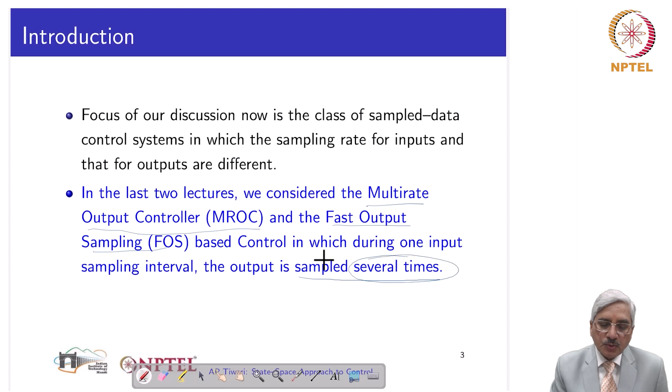In the previous two lectures, we considered the multi-rate output controller, abbreviated MROC, and the fast output sampling based controller, or the FOS controller. In both of these, the rate of sampling the output was faster compared to the sampling rate for the input. So during one sampling interval corresponding to the input, the outputs were sampled several times during that. These two controllers we discussed, the MROC and the FOS.

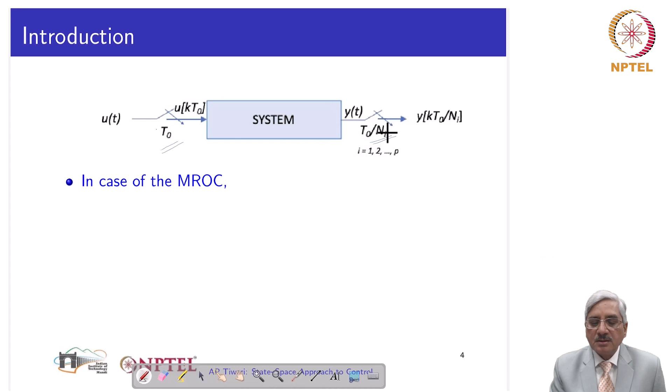In case of MROC, the input sampling rate is T0, the output sampling rate is T0 by N1, T0 by N2, etc. The control system is a dynamic control signal computed using the previous value of control signal and the multi-rate samples of output. This is just a recall. So MROC was characterized by this, that it is a dynamic controller.

The value of input at k plus 1 T is dependent on the previous value of input and again multiplied by the samples of output. And sampling rates of different outputs were different. So output 1 was sampled at T0 by N1, output 2 at T0 by N2, and so on. So in the multi-rate output controller, the output sampling rates for different outputs were different, allowed to be different.

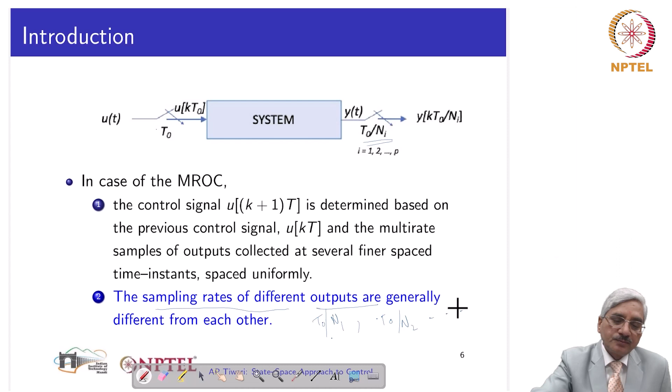Then we discussed the fast output sampling based controller. This is very similar and can be regarded as a special case of multi-rate output controller. In this one, the input signal is computed based upon the control signal. In this case it is non-dynamic, it is static. So previous control signal, that knowledge is not required. It is calculated based on the samples of output collected a number of times during one sampling interval.

So several finer time instants, at those instants the outputs are collected and from that the input is generated. The only difference from MROC is that the output samples are taken at the same rate for all the outputs. In MROC they were N1, N2, N3, etc., the number of samples in one sampling interval of input. Here it is N for all the outputs. All outputs are sampled at the same rate, N by T0.

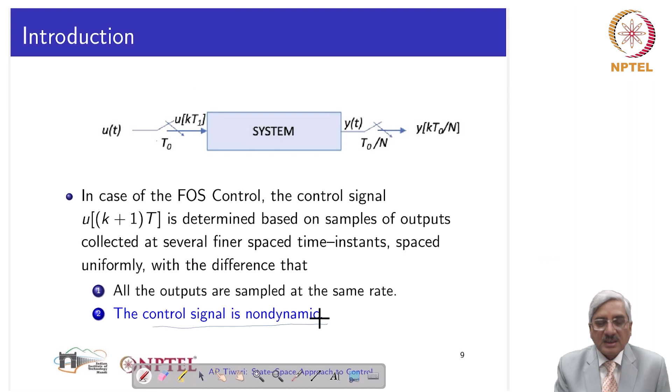If T0 is the input sampling rate. Again there is a misprint here, it should be u(kT0). I'm sorry for this misprint. So that is in what sense FOS and MROC are different. And of course, as I told, the control signal is non-dynamic in case of the fast output sampling based control.

Remember, in fast output sampling, the input samples were collected at larger intervals of time T, and the outputs were sampled at the rate delta. However, in periodic output feedback, the input is updated several times during one interval T. So the distinguishing feature of periodic output feedback controller is that the output is sampled at a slower rate 1 by T per second, and the input is sampled at a faster rate 1 by delta per second, and delta is T by N. N is an integer which is greater than 1, of course. So the inputs are sampled at several uniformly spaced instants of time during one output sampling interval.

This is one feature. The other thing is that control gains, I will explain this, they are periodically varying. That means control gain at some time is equal to the control gain sometimes in the past, and it will repeat again and again. I will show with the help of the mathematical expression.

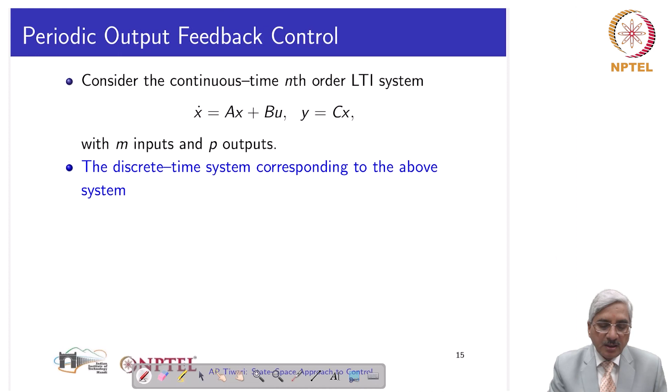And we have its corresponding discrete time system for two sampling rates. One sampling rate 1 by T and other sampling rate 1 by delta. And recall that phi(T) is e power AT, and gamma(T) is integral between 0 to T of e power A tau B d tau. Similarly, phi(delta) and gamma(delta) can be given; in place of T, we will have delta. That is the difference. So we have the same continuous time linear time invariant system, and we have the corresponding discrete time systems for the two sampling rates, one 1 by T and the other 1 by delta.

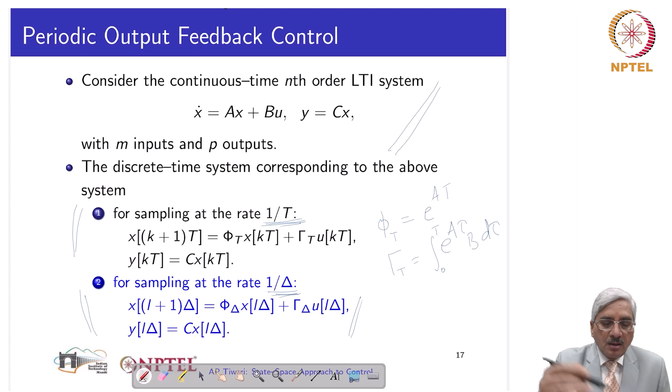So in one sampling interval of output, we divide and obtain n subintervals, and at the end of each subinterval we change the input, as given by this. The input between kT plus L delta and kT plus L plus 1 delta: during this interval, the input is again KL times Y(kT). Y(kT) is the output collected at this instant, multiplied by KL, giving the input for this period.

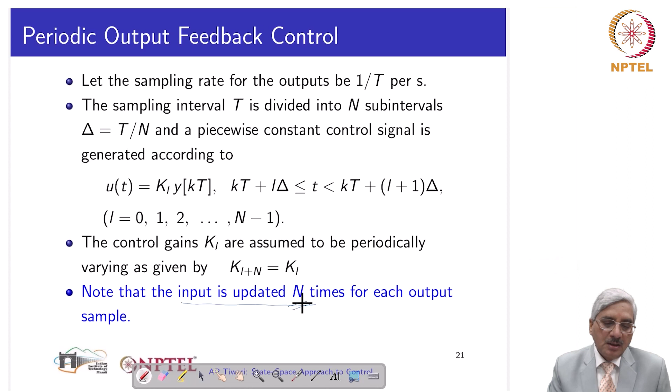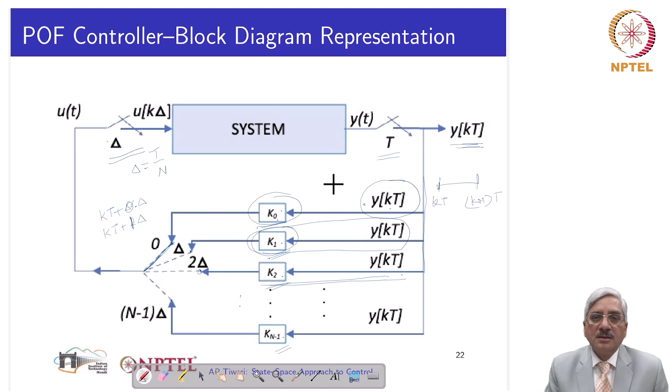Periodic output feedback and fast output sampling feedback controller can be considered as dual of each other.

Now we derive the expression for periodic output feedback control gains K0, K1, etc. We are going to derive the mathematical expression for that, and for this we start with the state of the system at different subintervals. So we consider the value of state at kt plus delta.

It is phi delta, the value of state at kt, and gamma delta into the input at instant kt. The state of the system at kt plus delta is given by this.

At kt plus 2 delta, the state will be phi delta into the state at the previous instant, considering time instants separated by delta subintervals. So phi delta into x at the previous instant plus gamma delta u at the previous instant, and this one we have here.

So we can substitute this expression in this one, and then we will have this expression: phi delta into this, which is the expression for x kt plus delta, and this is here. This we can further manipulate to obtain phi delta square. This and this will give phi delta square x kt, and then phi delta gamma delta into u kt, and then this as it is.

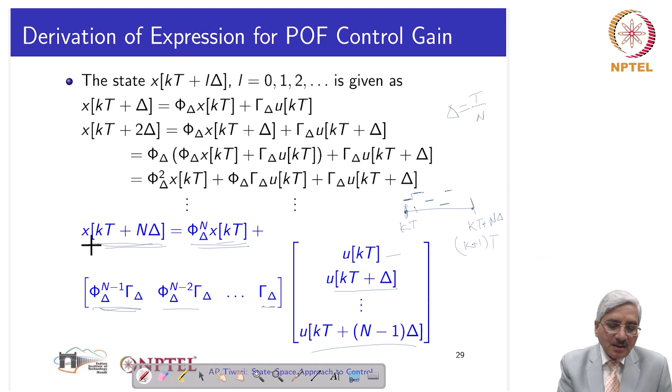So the values of the input, this one, this one, this one, etc., are generated from the sample of output at kt, multiplying by k0, k1, k2, etc. So that gives this one.

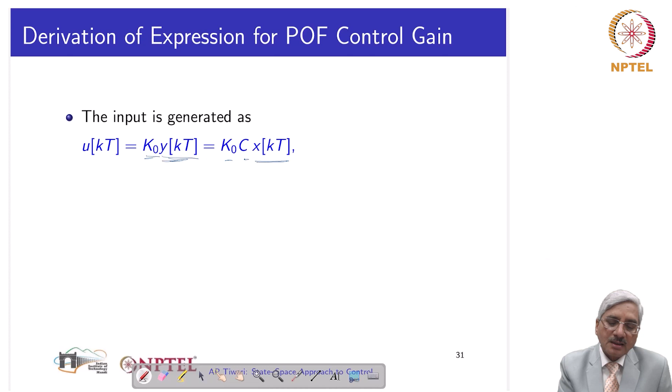Once we obtain that, the input is k0 times ykt, so it is k0 times cxkt, since Y is cx. At the next sub-instant of time, kt plus delta, u will be k1 times ykt, so k1 times cxkt. We are considering the output at kt instant only, so ykt is same as cxkt, and so we have ukt as k0 cxkt, ukt plus delta as k1 cxkt, and so on.

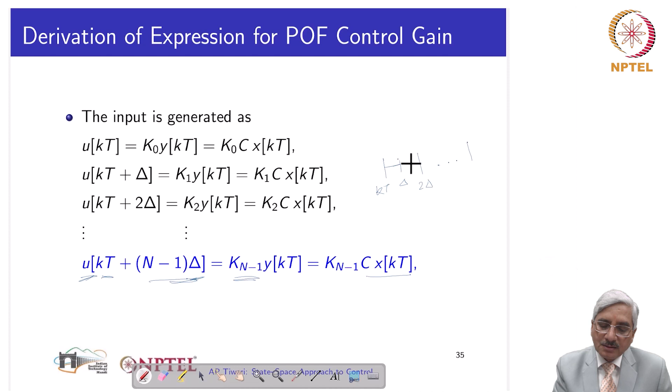The next input will be k2 times cxkt. In this manner we can go on, and we have the input in the last subinterval. This is kt to kt plus delta, this is kt to kt plus 2 delta, and so on, the last one being kt plus n minus 1 delta. This will be kn minus 1 into y, which is cx. So in this manner we have the values of input during these subintervals of time.

So based on these, we can have x kt plus delta from x kt, and this is the value of the input, which is y, multiplied by gamma delta. So we have x kt plus delta. Similarly, x kt plus 2 delta, and so on. In this manner, we will have x kt plus n delta given by this.

Now we start taking a look. This one is containing phi delta x kt. This one is containing 2 delta, so phi delta square. This is n delta here, so phi delta power n. And this is only delta, so it is gamma delta into k0. Here 2 deltas are there, so gamma delta k1 and gamma delta k0. Here n are there, so we have gamma delta k0, gamma delta k1, and so on, gamma delta kn minus 1, and each one is remultiplied by phi delta square, etc.

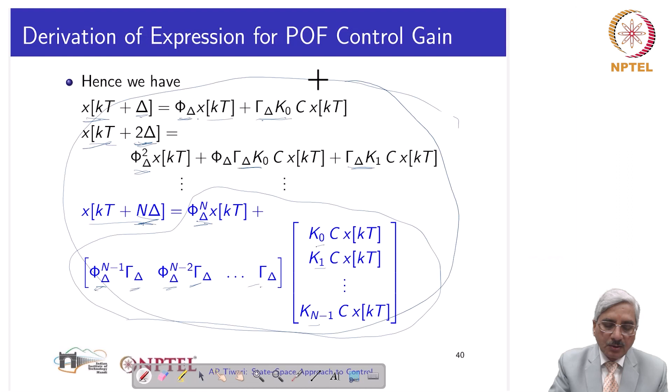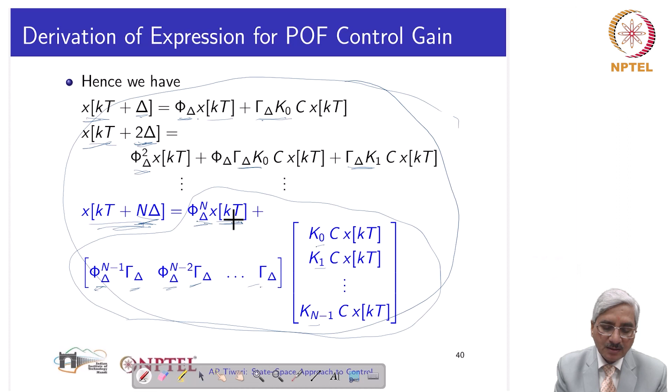From these expressions, those come. X k plus 1 t is x at the preceding sampling interval, at the rate 1 by t, multiplied by phi delta n, and then this product. This is this. This is this.

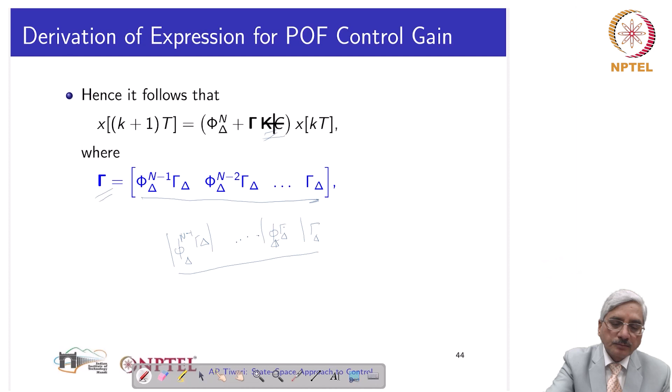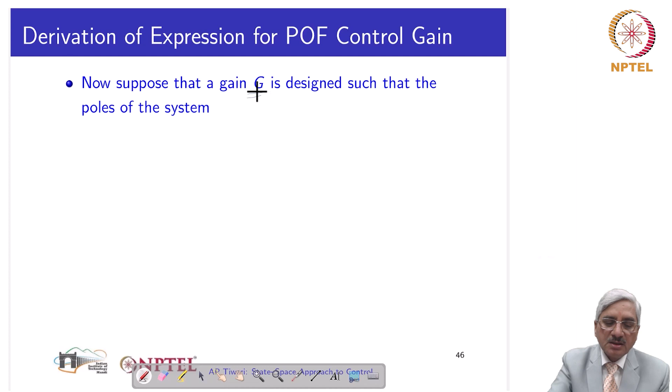Now at this point we hold the equations there and we think of a gain g in phi t plus gc, such that this phi t plus gc system will have desired pole locations in the unit circle, because we are talking of a discrete time system, so we are talking of the unit circle in the z plane. So we assume existence of a g for the system phi t c.

It is not phi t gamma t, please mind it. Phi t gamma t is coming from the state equation. Here it is c coming from the output equation. So we take phi t and we take c, and we assume that there exists a g such that this system will have desired pole locations.

Of course, this is the same as phi t transpose plus c transpose g transpose. So if we consider the dual of the system phi t gamma t c, and for the dual system, meaning phi t transpose and c transpose are considered respectively as system matrix and input matrix, we are designing a controller g transpose, which will be the gain.

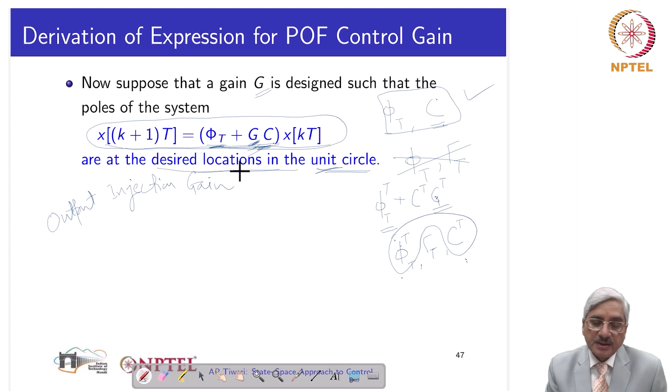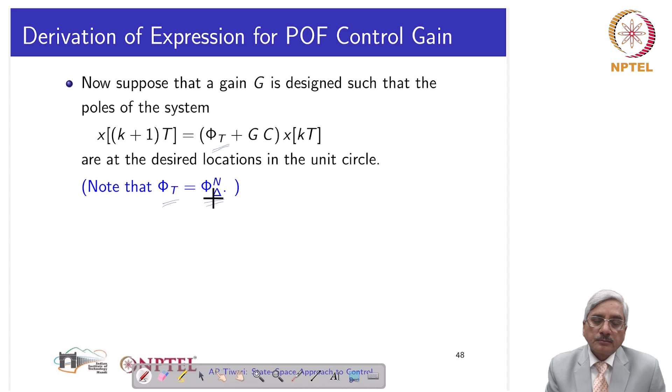That is done, and of course we have this relation: phi t is the same as phi delta power n. So we compare this system which we obtained in one of the previous slides and this closed loop system with phi t substituted by phi delta power n, and we see that the two systems will behave similarly, meaning the state at next time instant will be the same if this matrix and this matrix are equal, meaning that gamma c, gamma kc, and gc should be equal, and that means gamma k should be equal to g.

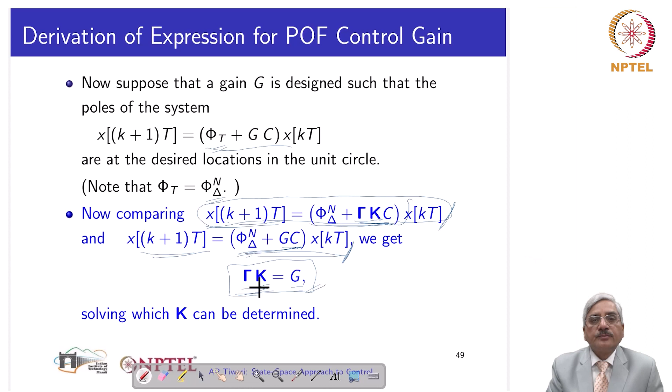This is the expression for the periodic output feedback gain, and this should be solved to get k. And of course gamma is this. So we can immediately see that this matrix will have full rank if n is greater than or equal to mu, and mu is the controllability index of the system, meaning...

phi delta mu minus 1 gamma delta, phi delta mu minus 2 gamma delta, and so on, gamma delta; this rank equal to rank of phi delta power mu gamma delta, phi delta mu minus 1 gamma delta, and so on phi delta gamma delta, gamma delta.

So this mu, sorry, all these are mu. So this mu is the smallest integer for which the rank of this matrix and the rank of this matrix are equal. That is the controllability index, how it is to be taken here.

And if we choose n satisfying this, greater than or equal to mu, then gamma will be full rank. And if gamma is full rank, meaning gamma inverse will exist, meaning we can solve this equation. It is so, that is one thing.

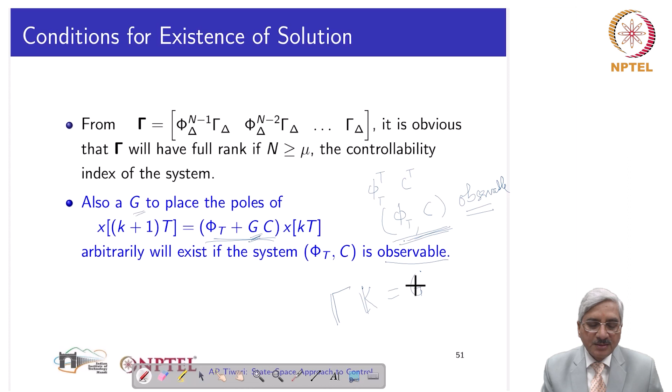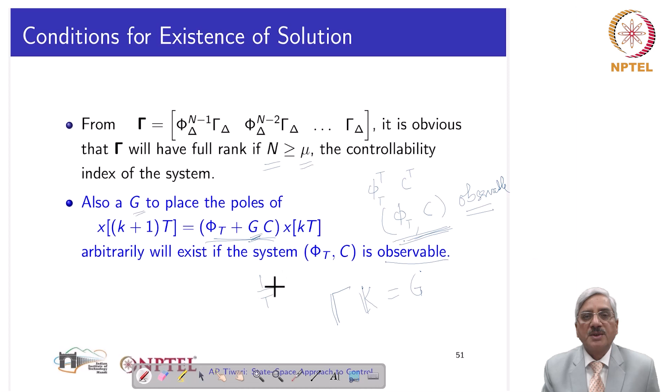So the solution to gamma k, this bold gamma k equal to G, will exist if n is chosen to be larger than or equal to the controllability index of the system, and if the system sampled at the rate 1 by t is observable. In that case, gamma will exist. This is summarized here: the sampled system should be controllable and observable, and the number of subintervals in t should be larger than mu, the controllability index. Then the solution will exist.

Now there are two possibilities. If n is exactly equal to mu, then the solution will be unique, because gamma is inverted, the number of unknowns equals the number of equations, and gamma has full rank, so its inverse will be obtained. So the solution of K will be unique.

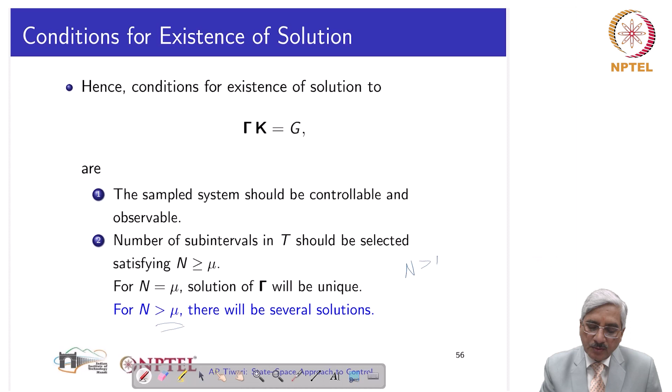However, if n is larger than mu, then some of the gains K are to be assumed, since the number of equations is fewer than the number of unknowns, meaning we can have extra considerations in the periodic output feedback gain design. So some K are to be selected differently and the remaining are to be solved from the equations. In this manner we can solve this for both n greater than mu and n equal to mu. Solution will not exist for n less than mu.

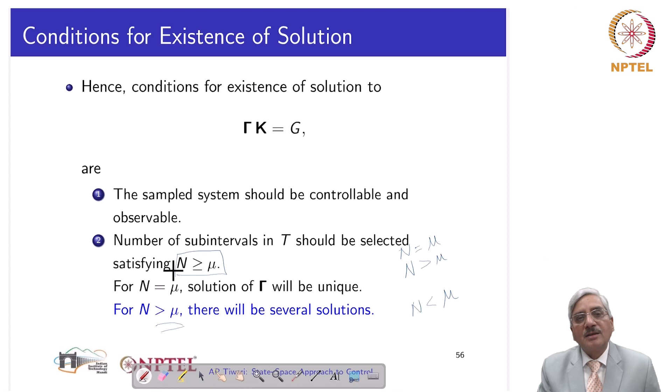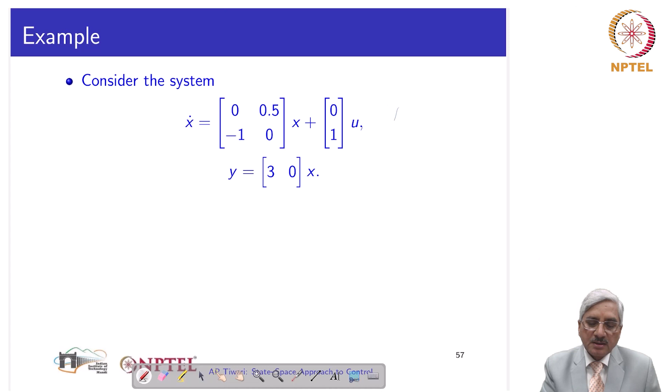We are constrained to select n greater than or equal to mu. Now let's see, with the help of the same example, the fast output sampling based controller. We consider that system, which when discretized for a sampling period equal to 1 second, gives this state transition matrix, or system matrix, and this input matrix, phi t and gamma t.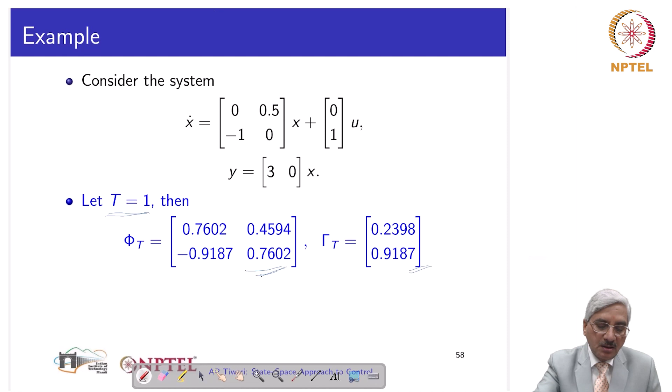Using this phi t and this C, we can design a G, and we see that this G places the poles of phi t plus gc at these two locations in the z plane. Both of them are less than 1, so the system is stable. It may or may not satisfy some transient performance characteristics, but just for demonstration of the design of a periodic output feedback controller, we consider G to obtain these pole locations for phi t plus gc.

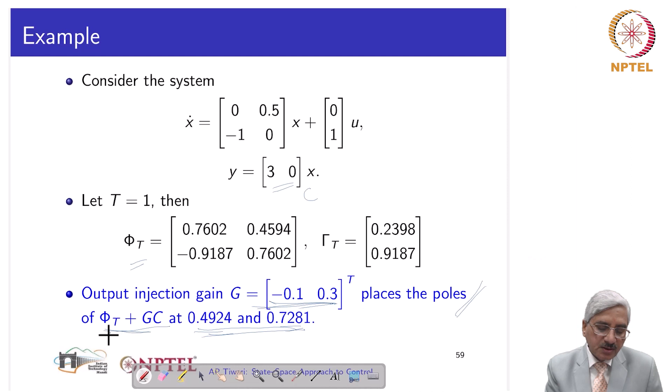Once G is there, the next job is to obtain K. That will require phi delta and gamma delta. So we select n equal to 2 subintervals in each output sampling interval, and delta becomes t by n, t by 2, so 1 by 2, which gives 0.5. For that, this is the system matrix of the discrete time system, and this is the input matrix for the discrete time system corresponding to the continuous time system in the example, for the sampling rate of 2 per second, 2 samples per second.

So then this bold face gamma is phi delta, gamma delta, and gamma delta, 2 columns, these. And then K is obtained as gamma inverse times G. G was there on the previous page. So gamma inverse G gives this, and this K is the required periodic output feedback gains. It will have the same pole locations as those which G gives for phi t plus gc. This K will give the same pole locations for phi t plus gamma k c.

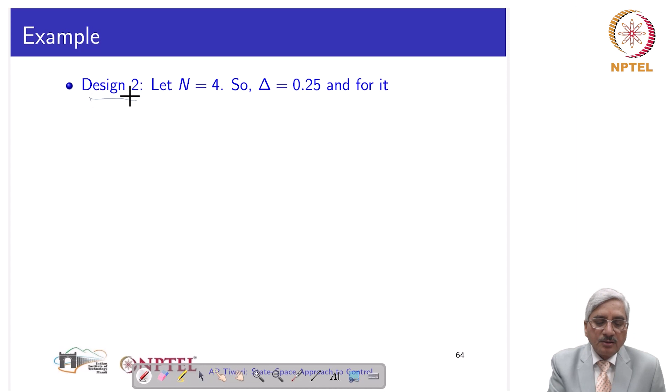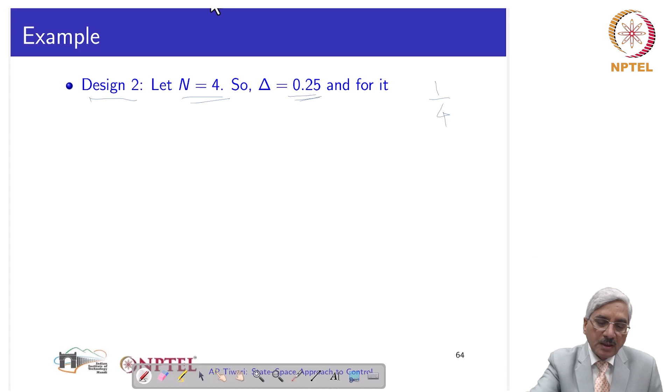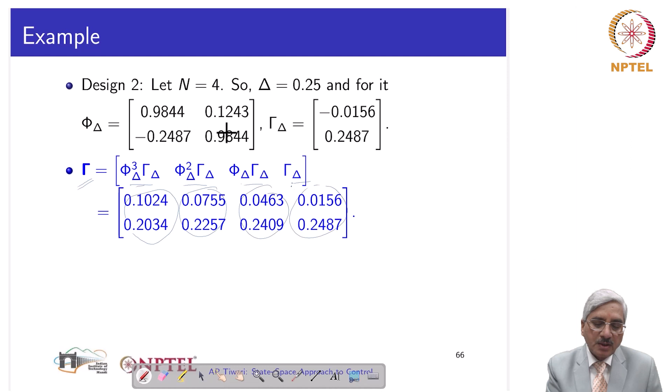We obtained that. We consider another design in which we select 4 subintervals into one output sampling interval, and then delta is 1 by 4, or 0.25, and for this we have this phi delta and this gamma delta, and G is the same. This bold face gamma now has 4 columns: gamma delta, phi delta gamma delta, phi delta square gamma delta, phi delta cube gamma delta, and these 4 columns are these 4. This we obtain from this phi delta and this gamma delta.

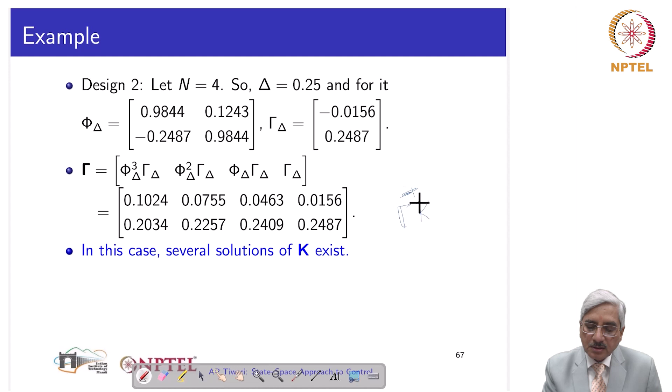Now if we evaluate gamma K equal to G, the solution to this, gamma is now a rectangular matrix, so several inverses are possible. So what we do is, this K, which will now have 4 elements K0, K1, K2 and K3, we can select any two of these and determine the remaining two. In this case, K1... actually K2 and K3 were selected, and K0 and K1 were obtained by solving the equation gamma K equal to G.

So basically, if this is gamma 1 and this is gamma 2, and if this is Ka and this is Kb, then gamma 1 into Ka plus gamma 2 into Kb equals G. In this we assumed Kb, so gamma 2 Kb is known, and that is subtracted from the right hand side.

So G minus gamma 2 Kb, that is equated to gamma 1 Ka, and so Ka is obtained by gamma 1 inverse times G minus gamma 2 Kb. This is Ka, and this was assumed. So out of 4 unknowns, because we had only 2 equations, 2 we assumed and the remaining 2 we evaluated from the 2 equations.

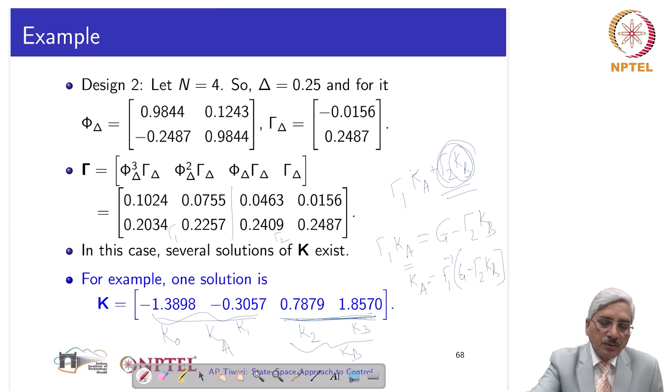Now we summarize. In periodic output feedback, the input is updated several times during each output sampling interval, and any output injection gain can be realized. Poles of the sample data system for the sampling period T can be placed at any arbitrary locations as desired, and here also an observer is not required.

So we conclude this multi-rate sampling controllers discussion with 2-3 more observations. First thing is that we considered MROC, multi-rate output controller, the controller in which each output could be sampled at different rates, and input was sampled every larger T interval.

Then we considered the fast output sampling controller. Each output is sampled at the same rate, n by T. Here it was n1 by T, n2 by T, etc. for MROC, but here it is the same rate n by T for all outputs.

And then we considered periodic output feedback, which is dual of fast output sampling. In fast output sampling, the output sampling intervals are smaller - output is sampled several times during each sampling interval of input. In periodic output feedback, the output is sampled at larger intervals of time, and input is sampled several times during one sampling interval of output.

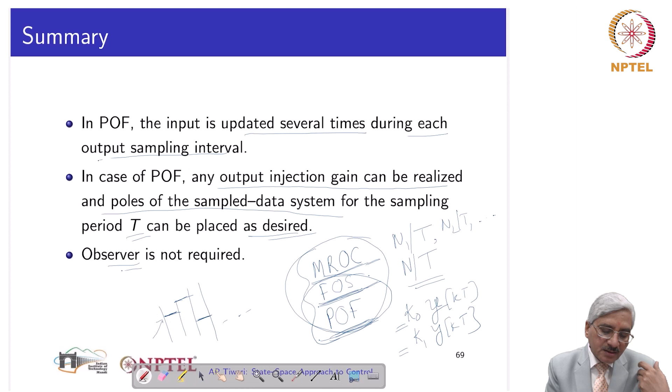Also correspondingly, the values of states at x(kT plus delta), x(kT plus 2 delta), and so on - these states will show a lot of variation, and of course the specification of output at y(kT) will be satisfied.

So one observes that in case of periodic output feedback control, the response of the system at the output sampling intervals is very smooth. At the sub-intervals, there can be jumps in the control signal u(kT plus delta, 2 delta, etc.), as well as in the values of the states. So this may not be desirable in certain situations.

Otherwise, periodic output feedback controller is the simplest of these three. In fact, periodic output feedback controller is the simplest, and multi-rate output controller is the most complex out of these three. All three, of course, are implementable through the use of digital control systems, discrete sampled-data control systems, and by incorporation of digital computers in the loop.